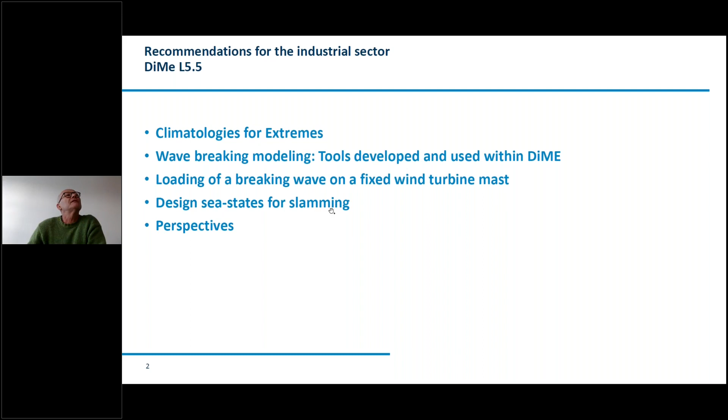Then I will come back on what Jean-François just presented minutes ago, both on the profile of breaking waves and also on the design sea states for slamming. But first of all, some additional results on the comparison we made on different sea state databases. These are hindcast databases.

On the one hand, we have HOMERE, which was built running WaveWatch 3, and on the other hand ANEMOC, the database that was built by EDF LNHE using Tomawac. These two data sets cover the Channel and the Bay of Biscay for periods of more than 20 years. They are different configurations, of course, but it was really interesting to compare them.

Here I will mostly present the results of the comparison in the case of the most energetic events, the storm events. We compared the two models, but we also compared each model with different buoys which are available on the Candhis network. We selected 9 locations in the Channel and the Bay of Biscay.

What we can say on the ability of these models to represent the energetic events is that they are both able to represent the storm events at the synoptic scale with good timing. The storms arrive at the right time at the location, and also with the right duration. So it's already a good result. But what was observed is that there are discrepancies in the distribution of the highest HS during these storms.

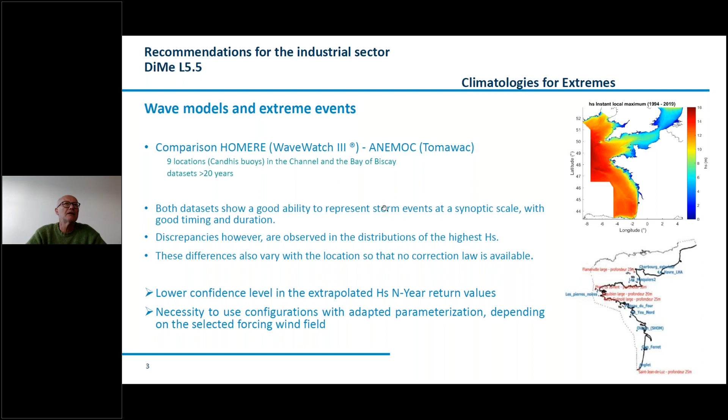Also, when we compare models or use models, we have to make sure that the configurations used have an adapted parameterization, which should be adapted to the forcing wind field used as input. This is connected with the work presented earlier by Fabien, the case study for the stormy winter

2013-2014, which was replayed with many configurations using WaveWatch 3, considering the two wind fields, the satellite blended winds and the ERA5 hindcast, and also introducing various parameterizations of the source terms. We already presented the main results this morning.

The first conclusion from this study was that when running WaveWatch 3 to build the hindcast database, especially for the characterization of design conditions, combining the ERA5 wind fields with the TEST500 parameterization probably provides the best alternative for the simulation of the sea states when considering storms.

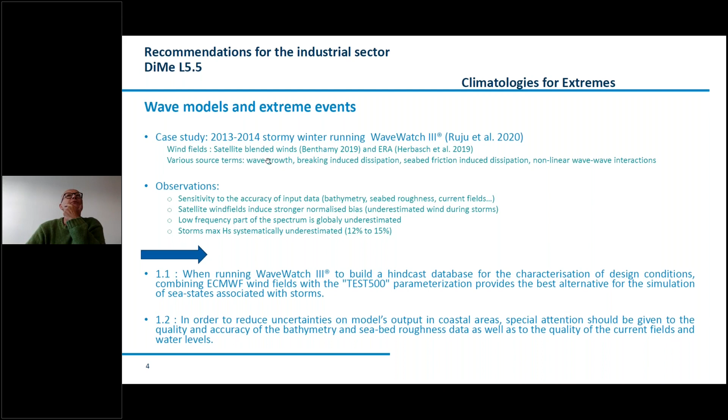The second point was that if we want to reduce the uncertainties on the model's output, especially in coastal areas, we really have to give special attention to the quality and accuracy of the elements that we use for the configuration, such as the bathymetry, the seabed roughness, but also the quality of the current fields and water levels. All these parameters are of real importance in the definition of the configuration.

Another point that can be presented here, an additional point, is the ability of the usual spectral formulation to represent stormy events or extra energetic events. So you know that all the information is comprehensively described by the directional spectrum, which can be decomposed in a frequency spectrum and a function that describes the directional distribution of the energy density. I will not talk much about the directional aspects here. I will focus on the spectral information.

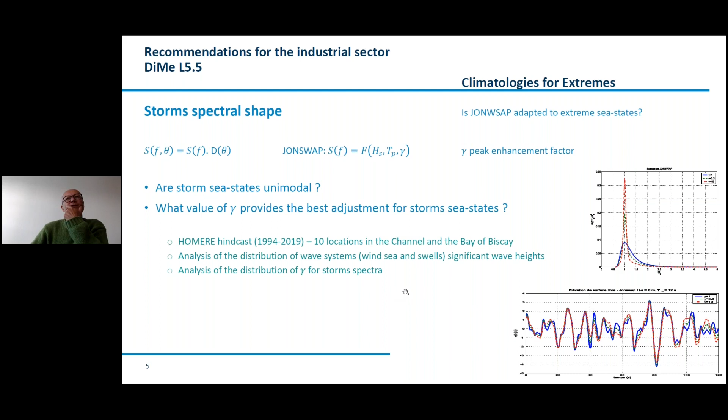So the first result, based on the statistical analysis of the distribution of significant wave height of all unimodal sea states, unimodal wind seas, and unimodal swells, we can see that for the highest quantiles there is a large increase of the number of unimodal sea states. For instance, for quantile 0.98, about 80% of the sea states are unimodal. This ranges between 70 and 90% when considering all the locations we've investigated in the study.

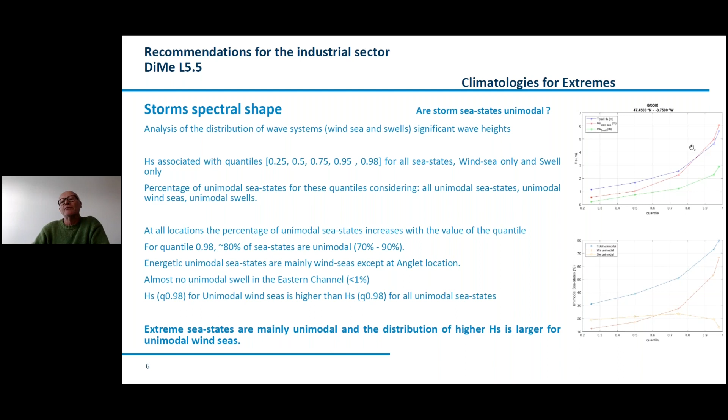And also, what we can see is that the HS for the quantile 98 for unimodal wind seas is higher than the HS for the same quantile for all unimodal sea states, so we can conclude that extreme sea states are mainly unimodal, and the distribution of the higher significant wave height is larger for the unimodal wind seas. So this was the first result, and the second one is related to the assessment of the value of the peak enhancement factor.

So we didn't use this formulation, but we preferred to fit theoretical JONSWAP spectra having the same HS and peak period as the HOMERE spectra that we had extracted. And for all the spectra, we tried to adjust the theoretical JONSWAP just by varying the value of the peak enhancement factor in the range between 1 and 7. The adjustment was made by minimizing the normalized RMSE that was assessed over the whole frequency range.

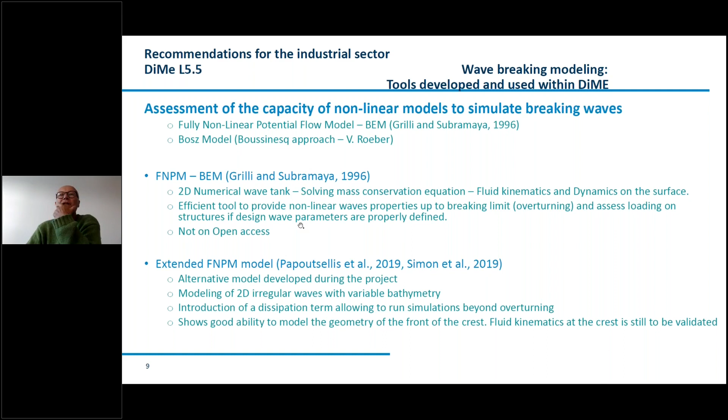It's also a 2D model, but it takes into account irregular waves with a variable bathymetry. And also a dissipation term was introduced in the model so that it allows running simulations beyond overturning, so that we can consider a longer series of waves. This model also shows a good ability to model the geometry of the wave, especially the front of the crest. But there's still some work to be done regarding the validation of the fluid kinematics at the crest when we consider using this model for slamming loading assessment, for instance.

Regarding the Bosz model, some results have been presented this morning by Matthias in his presentation on the Biarritz area.

So what's interesting in this model is its ability to account for the kinematics and dynamics of 3D irregular sea states on domains which are relatively large. I mean, a few square kilometers. It's at least the size of a marine renewable energy plant. So it can be really interesting.

And so it's been applied to 3 different sites and for 3 different tests. One in Esquibien in South Brittany, one at the La Jument Lighthouse that Jean-François showed you just earlier, and as I mentioned, the Biarritz location. And during the project, some developments were completed, improvement of both the numerical solver at the boundary and also the numerical scheme for the wave propagation. And also the new breaking criterion that was implemented in this model.

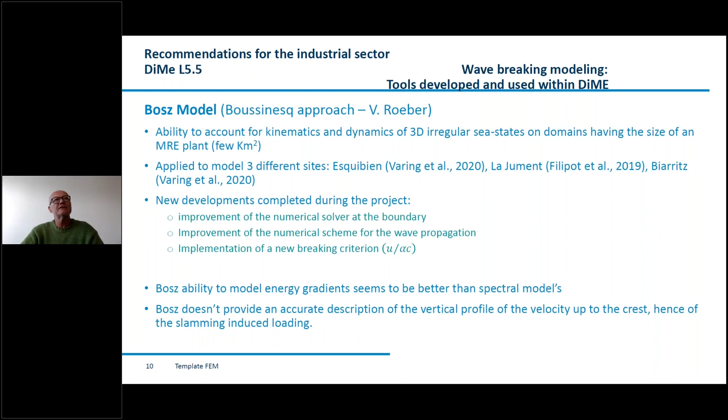So as Matthias showed, the Bosz has a good ability to model the energy gradient, and it seems that this ability is even better than the ability of the spectral models to really model the gradients of the energy over the given area. Probably the small problem with the use of the Bosz model in the case of slamming loading is that the description of the vertical profile of the velocity up to the crest is probably not as accurate as in the other models. So that's still an interesting model.

So the two conclusions here are: if an approximation of the design wave can be obtained by means of a harmonic wave train, a soliton, or a wave packet, that is a short wave group, then the fully nonlinear boundary element models allow for the identification of the necessary information for the estimation of the slamming forces. And when we are to take into account not just small wave packets, but irregular design sea states, we can use the modified version of the model, which includes an attenuation term. This model has been developed and is now available, but in that case, it must be noted that the fluid velocity at the crest is probably underestimated, and there is some validation work still to be conducted here.

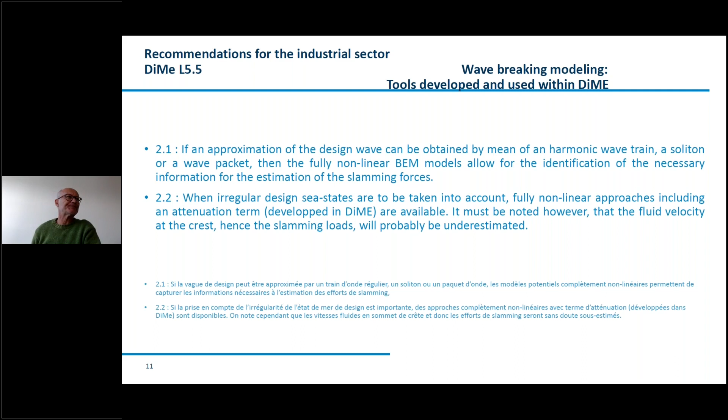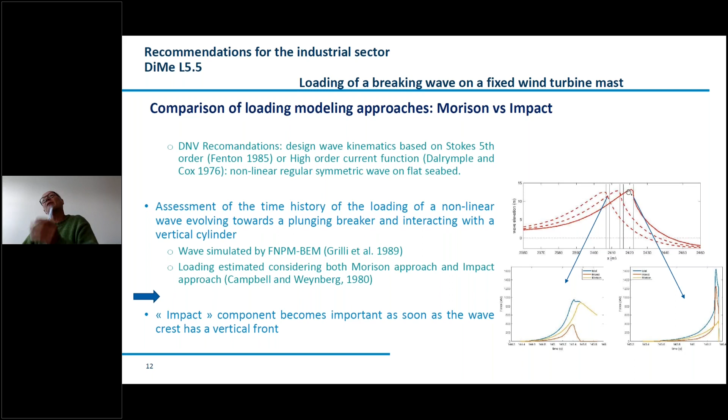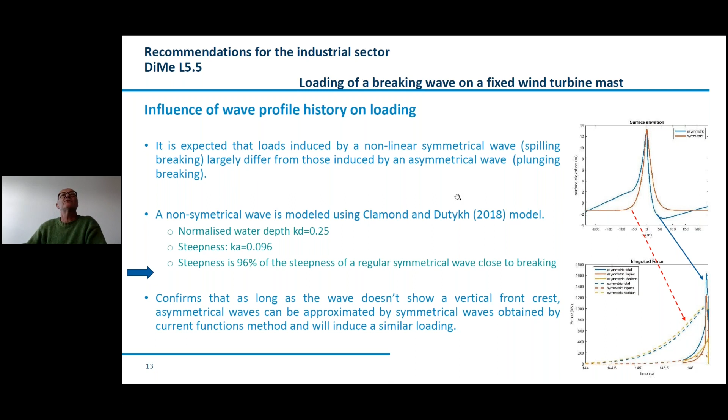Now I'll just say a few words about the loading of breaking waves on a fixed wind turbine mast or a vertical turbine mast. The results were presented by Jean-François just 10 minutes ago, so I will not get back into too much detail. What is to be noted is the importance of the impact component of the loading as soon as the front of the crest is vertical and almost parallel to the structure itself. So this is really important, and it also shows that it's important in that case to consider an asymmetric wave, which will correspond to the case of a plunging breaker, rather than a symmetrical wave, which is probably more related to the breaking associated with a spilling breaker.

So the two conclusions here are that the loading is predominantly of the impact type. When the wave shows a vertical crest front, it's then necessary for proper assessment of the extreme loading to provide an accurate statistical characterization of the front height parameter, together with the other parameters of relevance, which are the phase velocity and the crest height. And the second point is that models of regular symmetrical nonlinear waves can be used as long as the considered sea states do not include waves having a vertical crest front. For other cases, considering a symmetrical wave provides a reasonable approximation of the loading, even for relatively asymmetrical waves. But again, as long as we don't have this vertical crest front.

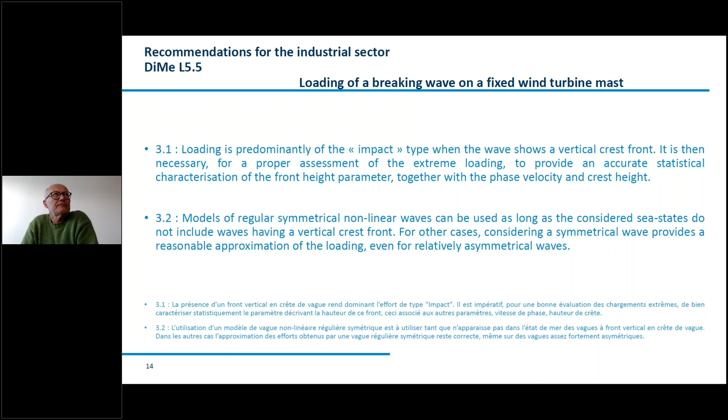Probably the last aspect of this recommendation is related to the definition of the design sea states for slamming. The question we can raise here is how to characterize sea states with a higher chance of slamming. If you look at the literature, for instance, you have this reference by Paulsen et al., in which they consider that the slamming loading for design can be considered as soon as the steepness, which is defined by the product of the average wave number times the significant wave height, is higher than 0.3.

And if you look at the recommendation given by DNV regarding slamming on the cylinder, the chances for breaking are related to sea states for which the breaking wave height is equal to 1.4 times the significant wave height associated with the chosen return period, which could be 50 years or 25 years or 100 years. So there are two questions when we consider this kind of design criteria.

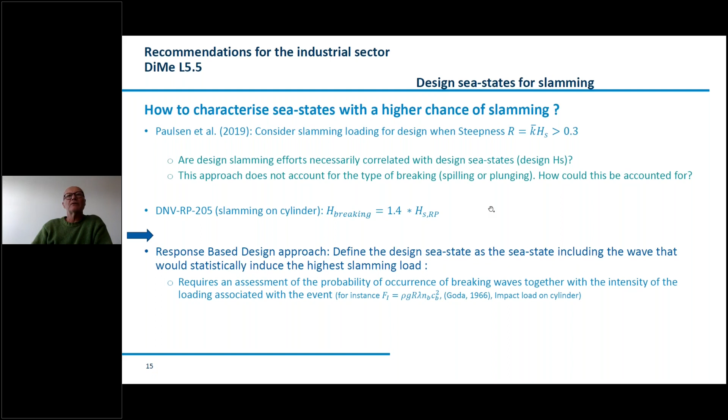But to get this, there are two requirements. We need to have an assessment of the probability of occurrence of breaking waves, together with the intensity of the loading associated with these extreme events. And so for the loading, we can use formulations such as the formulation provided by Goda, which was presented earlier by Jean-François for the impact load on cylinder.

And regarding the parameterization for the breaking probability, these are the work presented earlier this morning by Fabien and the work by Stringari et al., which ended up in a new approach establishing a joint law between the fluid horizontal velocity at the crest and the phase velocity of the wave, and considering the Gaussian approach, which is related to linear waves.

However, in spite of this assumption, it was possible to introduce a corrected theoretical breaking criterion, which is alpha with a value of 0.24, and Fabien also showed that this value could probably be extended if we consider not just the spectral bandwidth limited to the energetic waves, but the whole distribution; we could extend this value up to 0.3.

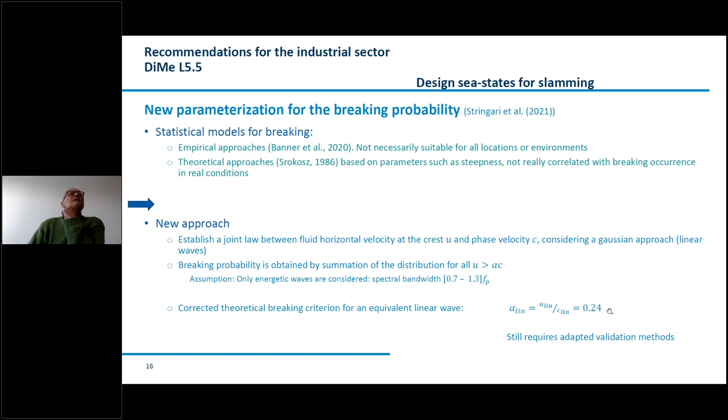So the last recommendations associated with these results are: the definition of the design sea state and design wave for impact loading must be based on a good knowledge of the sea state statistics. That's the first point. And it may result in a design sea state or a design wave that differs from the usual design values, which are classically related to the highest waves. The second point is that the breaking probability assessment can be based on works by Stringari et al. that were developed during the project, with this value of the coefficient alpha.

But it is necessary, in order to close the problem, to have a good knowledge of the statistics of the breaking severity, the curling factor. So is it a spilling breaker or is it a plunging breaker? What is the occurrence of this kind of events, combined with the breaking probability itself?

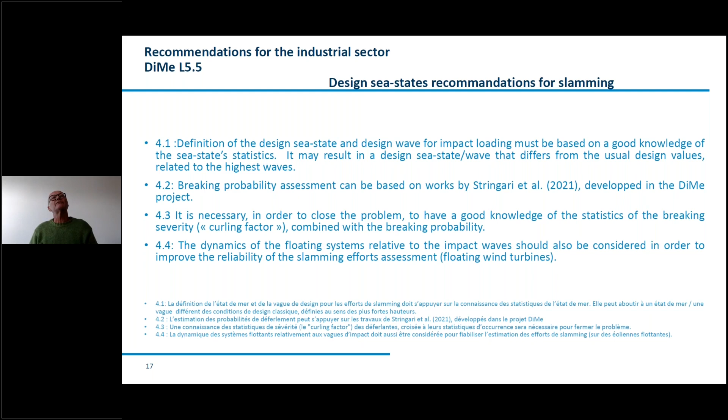And the last point to be considered has not been discussed here, but it's important for future projects related to the outcomes of the DiMe project. The dynamics of the floating systems relative to the impact wave should also be considered in order to improve the reliability of the slamming efforts assessment, especially for the case of floating wind turbines. So these are the main outcomes that we've tried to present in the form of recommendations to make them easier to handle.

But as you could see, a lot of work has been done, and we often come with more questions at the end of the project than we had in the beginning. So there are still some challenges to respond to. For instance, there is a clear necessity to improve the modeling capacity for breaking irregular waves in arbitrary depth. We also need to improve our modeling capacity for realistic extreme wave climatologies in coastal areas, so for bathymetries between the coastline and down to 200 meters water depth.

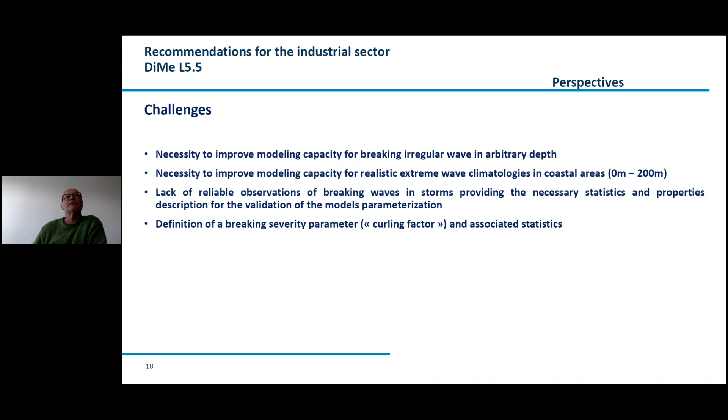There is a lot of effort to be done on access to reliable observations of breaking waves in storms, which are necessary to provide the statistics and properties description for the validation of the models, and especially of the parameterization of these models. And there's a last important aspect, which is the definition of a breaking severity parameter, the so-called curling factor, and the associated statistics.